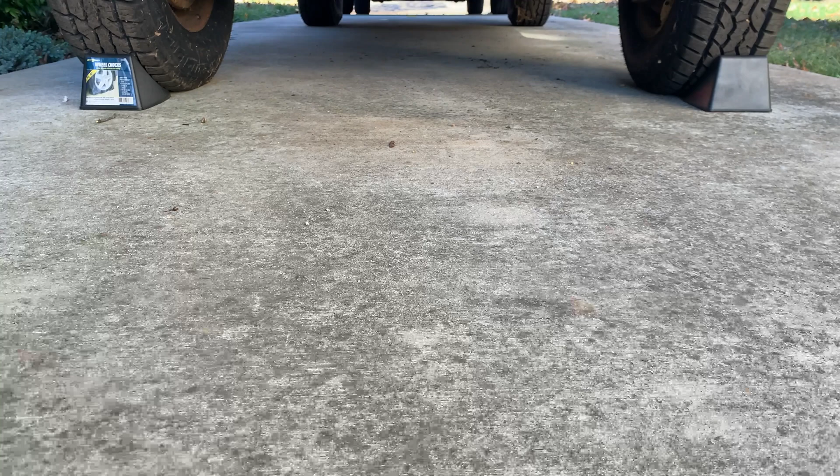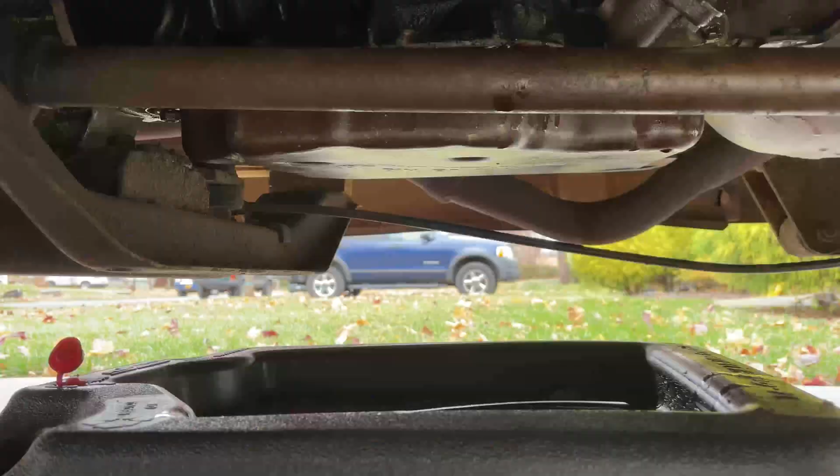Time it is. I've been putting this off for a month now, mainly because I just don't have time to commit to doing this, because this is going to be a long process. But I need to check that pan for debris, and the vent line that is way up there behind the dipstick. I need to flush that out with some brake clean to make sure that's not why this thing is puking fluid out of the dipstick tube.

So I've never done one of these before. I've seen enough people do it to know that it's messy as all get out. So I'm gonna try to record some of this and show you what happens, but I make no guarantees, because the Jeep's just sitting on the ground. There's no ramps or jack stands under it right now, so this is pretty low, and filming is going to be hard. I really don't want to ruin my phone camera with transmission fluid, so I'm going to let this

thing drain. If anything funny happens, I'll show you, but once we get the pan out of there, I'll let you guys see what's in it, and I'll show you where the vent tube is if you don't know. And I don't know, I'm going to put brake clean down it. I don't know if that's the right way to do it, but I've heard of other people doing it. As long as the pan is off, it should just come straight out and go into the catch pan. Obviously I wouldn't think you would want that floating around in your transmission pan, but yeah, as long as it's open.

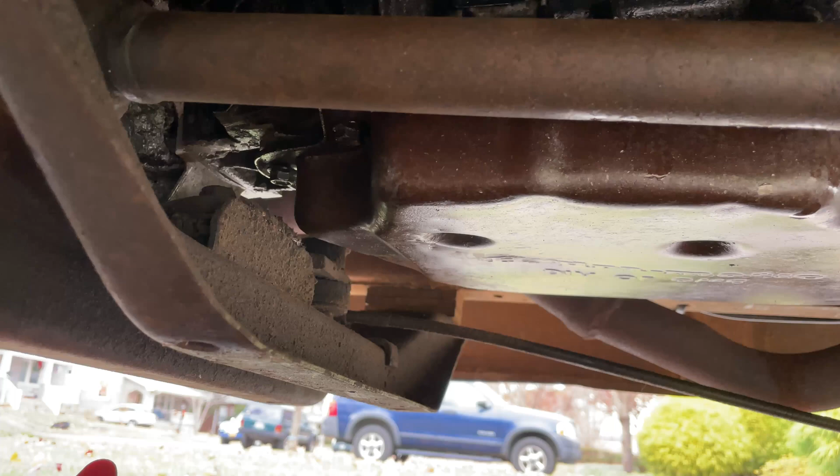So at least, worst case, when it goes time to put it back together, I'll be able to get my fingers up in there to get it tight, or get them started, and then the little box end in there to finish them down. All right, let's get rolling. Enough talking, enough stalling. Let's get covered in transmission fluid.

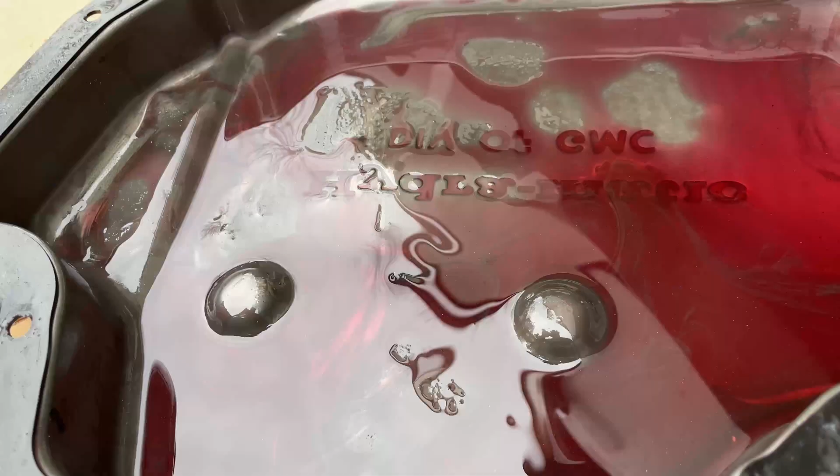All right, there's the pan. See, there's a lot of shiny stuff in there. Not a ton, it's kind of hard to see because the fluid is shiny. But let's see, it's not piled up or anything, but it's definitely in there. And you can see it's kind of glittery on the gloves too. And didn't make too much of a mess getting it out. But there she is. The next trick's going to be to get that cleaned up so I can get under it without getting dripped on. You can see it's kind of made a mess out of my work area.

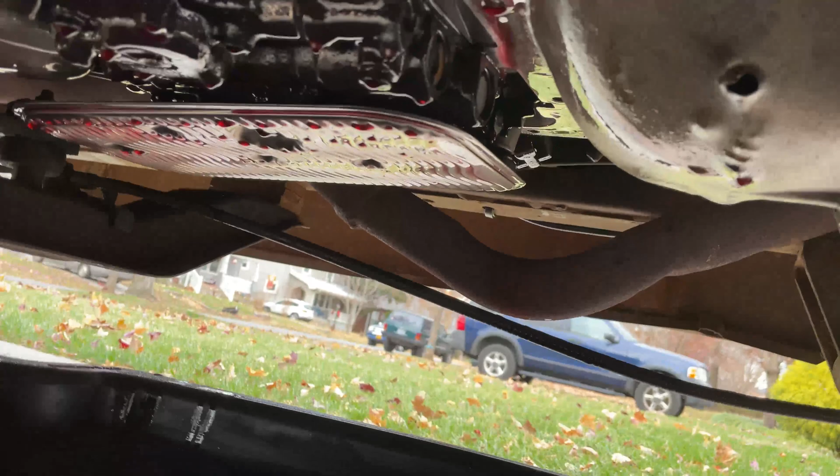Get that filter off of there and get the new one on. Get the mating surface cleaned up there, and the new pan gasket on. So I'm going to clean this pan up with some brake clean, and then I'll show you the kit. We'll get to flushing the vent tube next after that. Alright, so the vent tube, if you're curious, is on top of the transmission.

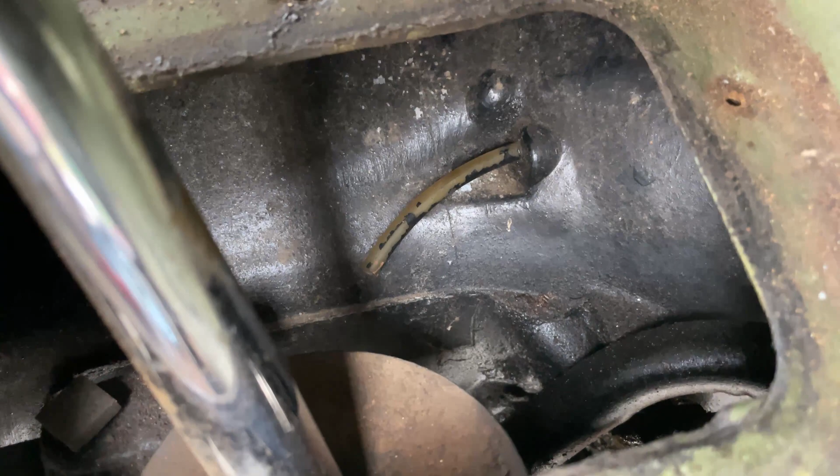It's right there, that little thing. Mine's plastic, but I don't know if that's normal or not, who knows, but it'll be there on a TH400, and it's just right under the four-wheel drive shift lever plate. So there's a gasket, the rubber plate, and then the actual boot. So what I'm going to do is I'm going to take some brake clean and try to get the straw for the brake clean can up in there and blast some in there, and hopefully it'll come out into the transmission catch pan that's under it.

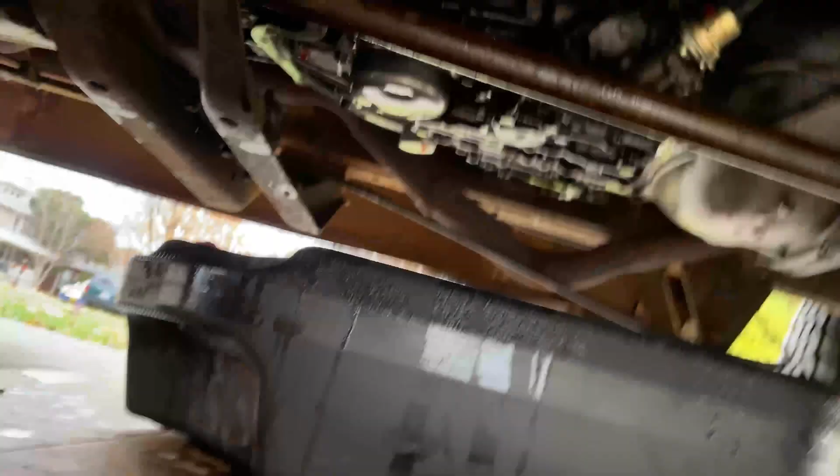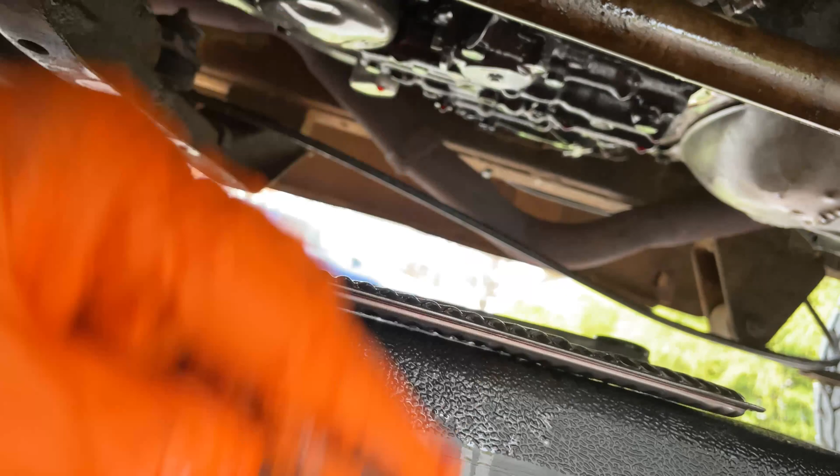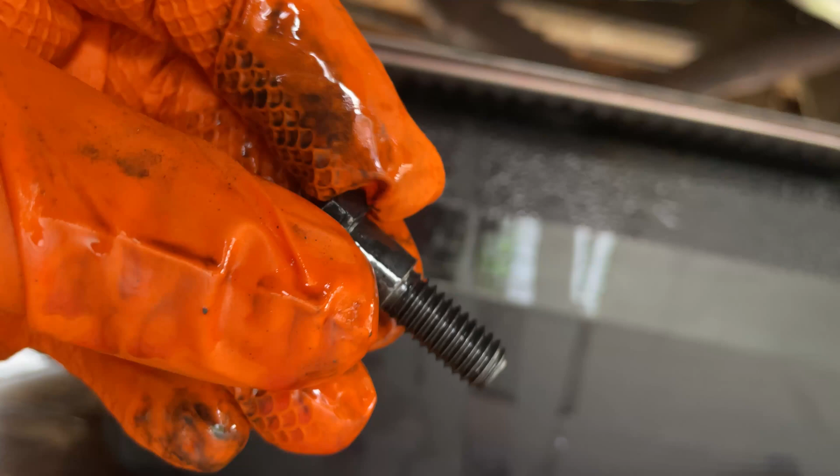But we'll see. I also noticed on the transmission filter, that hole right there is where the bolt goes to fasten it up to the transmission. It goes up into that hole right there with this shouldered bolt. Now in my case, the shouldered bolt was all the way down, but the filter was just doing that on it. I don't know if that's supposed to be that way. I have a feeling there's supposed to be maybe some kind of washer or something that goes in there to take up that slack. But also the filter was barely hooked up. It just fell off.

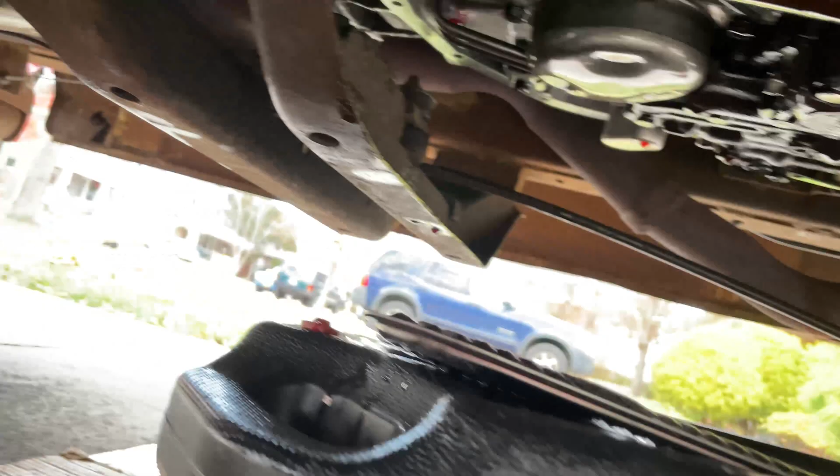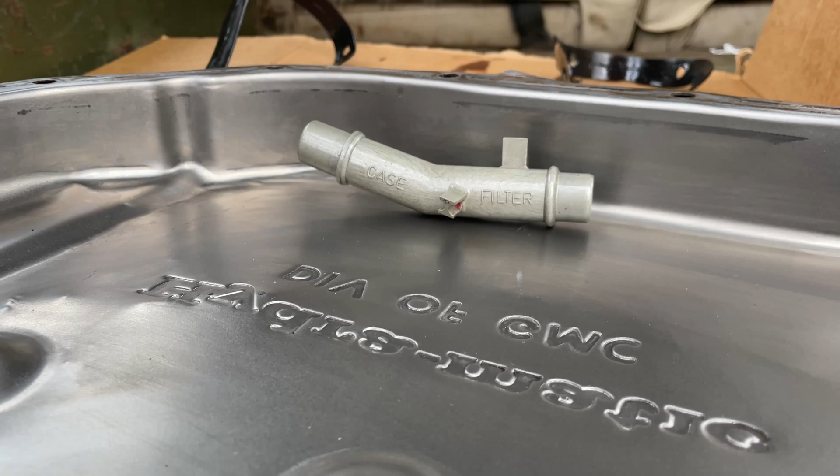I'll show you, there's a tube too. There's the pan all clean, but that little tube just goes in there. You see it's labeled case filter, so filter side goes into the filter, case side slides up into the case. There's an O-ring up in there, I guess. It all came out as one piece. I'll figure that out next. We have to throw a washer on there or something to snug that up. But I'm gonna keep moving.

Again, I turned that little guy up a little bit, gingerly. Don't want to break him off. This is the third time I've done this. The first two times not much came out, but now it's coming right through. So I don't know if that's telling me that I flushed something out of there or what. I also don't know if that's bad for the transmission.

I assume that the vent tube just comes right out of the bottom, so if I let the brake clean evaporate, I'll be fine. So if you're watching this video and you choose to do it this way, your mileage may vary. I've seen others do this with TH400s with no negative side effects. But like with all things on YouTube, take it with a grain of salt. If you're not willing to potentially damage your transmission, then take it to a professional, or I guess do some more research.

But I'm comfortable with doing it this way, just because I've seen others do it and it seems to work. But I'm going to let that drip. I'm going to flush it a few more times just to make sure. And yeah, next steps are going to be looking for a washer to put that filter back on, get all that reassembled, pan back on, and then we're going to crank it up, top it off, and hopefully that will fix our problems. Or I just made it much worse. I don't know, but that's part of learning, isn't it?

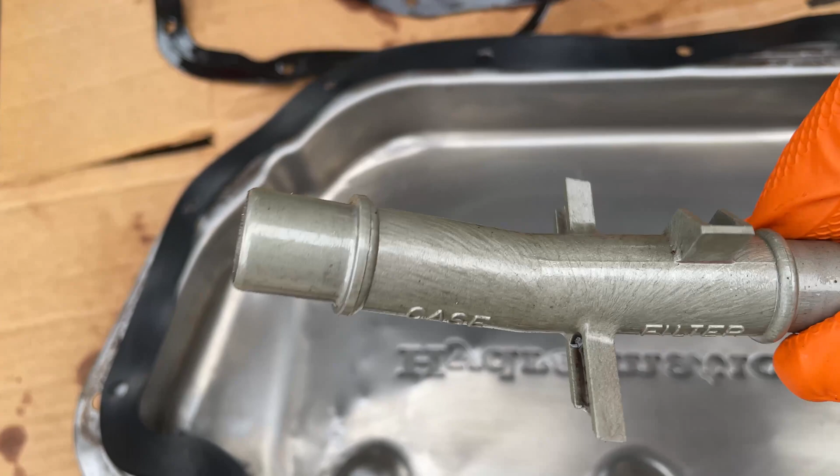Okay, so here's another close-up look at this little thing. It's just plastic. Cleaned the pan out with some brake clean. This is the new gasket, and I just checked it does line up. Check it before you throw the old one away. This one's still in okay shape, so I could probably reuse it. It looks like this thing was serviced relatively recently, which could be good or bad, I don't know.

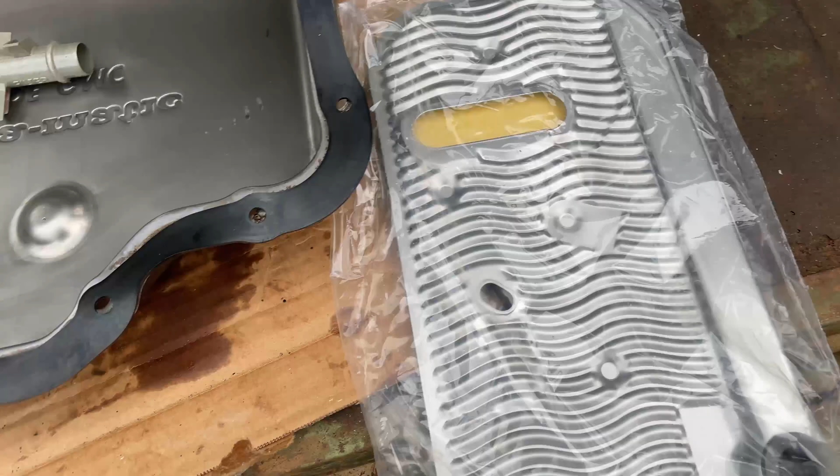Here's the new filter, and you see there's still no grommet there, so I'm going to have to figure out what to do, or go look at the parts book real quick and see if there's supposed to be a spacer in there to make that bolt tight. And this is the part number for the kit. I got this off of Rock Auto, I think for $10 or $15. It includes the gasket and the filter, and that's pretty much it.

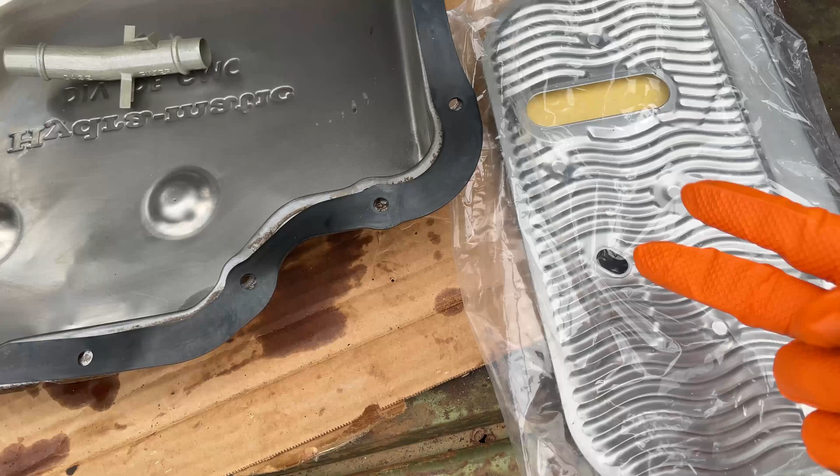So let me go see what I can find on the parts book about what to do with this. If there needs to be a washer in there, or if that's supposed to be able to move. I mean, maybe it's supposed to be kind of floating in there. I don't know. I don't think so. That seems like a bad idea, because that will allow this to come loose. But who knows? Maybe it's designed that way. We'll go find out.

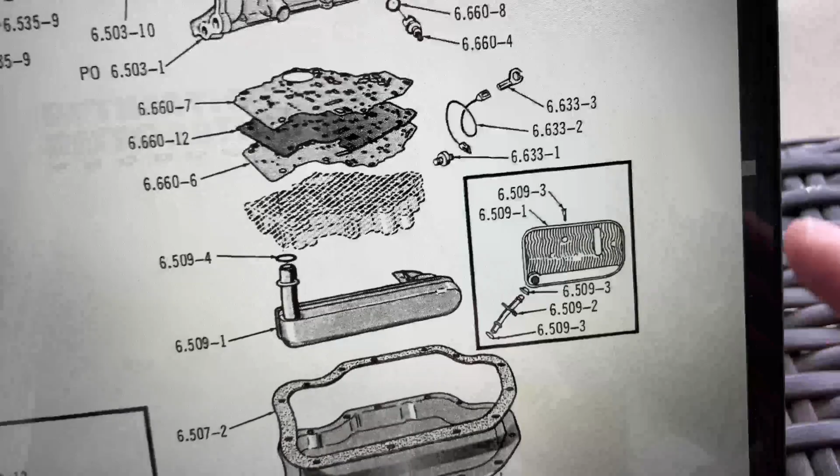Okay, so here's where we're at. Nothing like using a camera to film a computer screen, but here's the parts book. You can see the filter right there, and if we take a close look at it, there's the bolt, filter, there's our O-ring, there's our filter neck, and then there's the O-ring that stayed in the transmission when I pulled the filter neck down. I don't know, maybe that's how it's supposed to be.

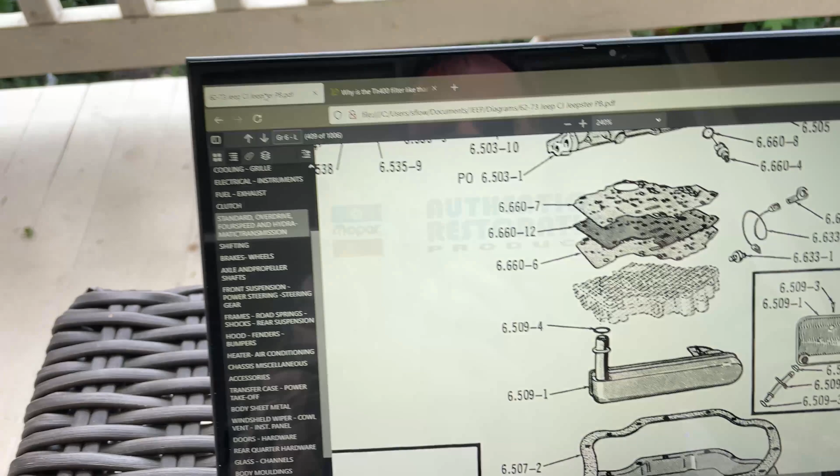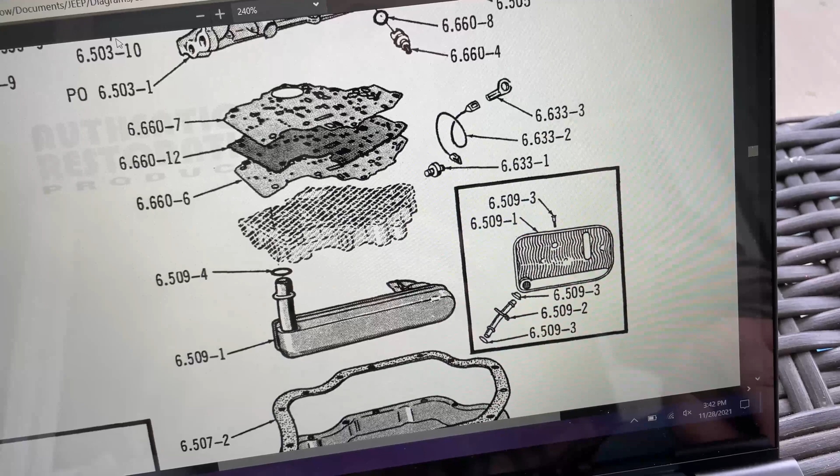So my guess would be that maybe it's to account for angles in the transmission. So if the fluid goes low, the filter kind of floats in there. Or if you go up an incline or something, maybe, I don't know. It was shifting just fine the way it was. The only issue is it's burping fluid out, which is making it run low and then slip. So I'm gonna put it back together the way it is. I'm gonna give it a little bit more time to drip dry, and then we're gonna get the show moving.

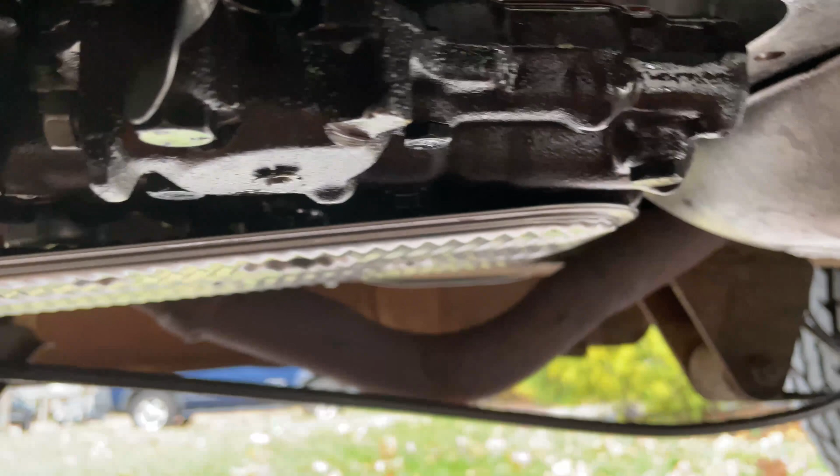So there's our new filter. It's kind of a pain to get that neck re-engaged over there, but it's in. There's the pan. Notice how the filter is flush against the front of the valve body up here and then kind of dangles back here. I'm gonna show you how it has a lot of slop in it. That's what I was worried about, but apparently that's normal. I don't know.

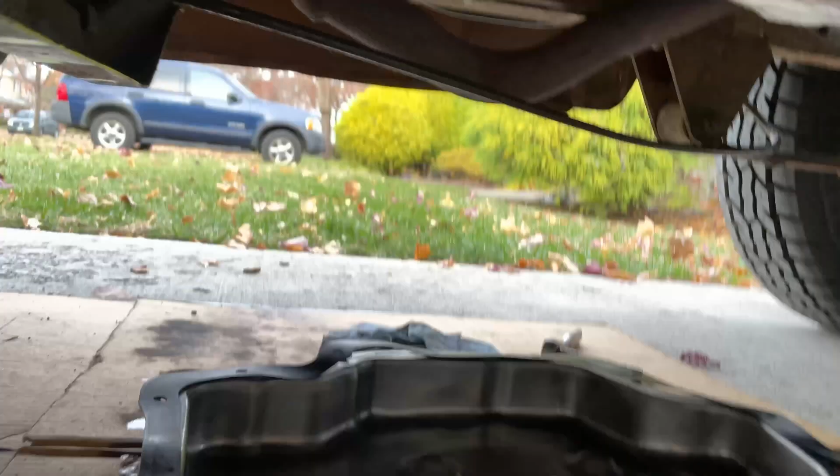So I'm gonna get the pan here. I'm gonna try to get a couple bolts in with that gasket and get it situated. I'll work my way around to the back here, and then start buttoning it up. It's been sitting about 30-45 minutes to let that brake clean evaporate out of there and drip. And it's done dripping now, so whatever's gonna come out is out. So we're getting closer to the finish line, but let's go ahead and wrap it up.

There it is, back on. Not super hard to get back on. The gasket was tight enough that it actually held the bolts in for me while I snug them down. Kind of like doing the valve cover gasket, kind of work your way around. Don't snug one all the way up and then start the one next to it. Do it in stages. You don't want to warp the pan or anything.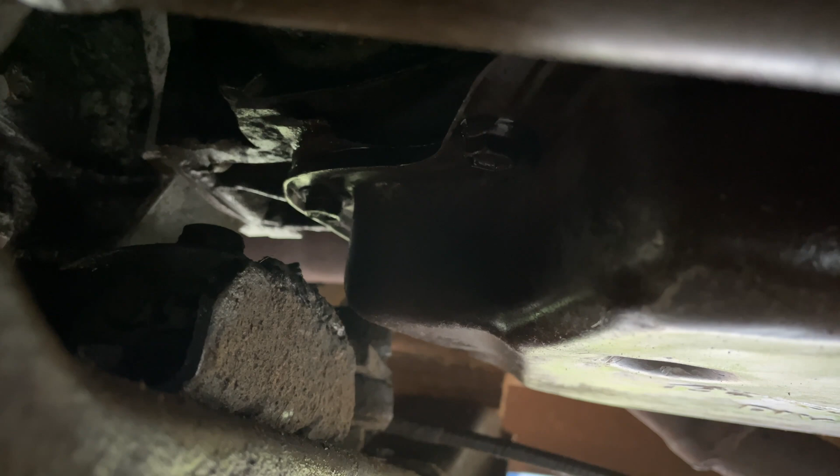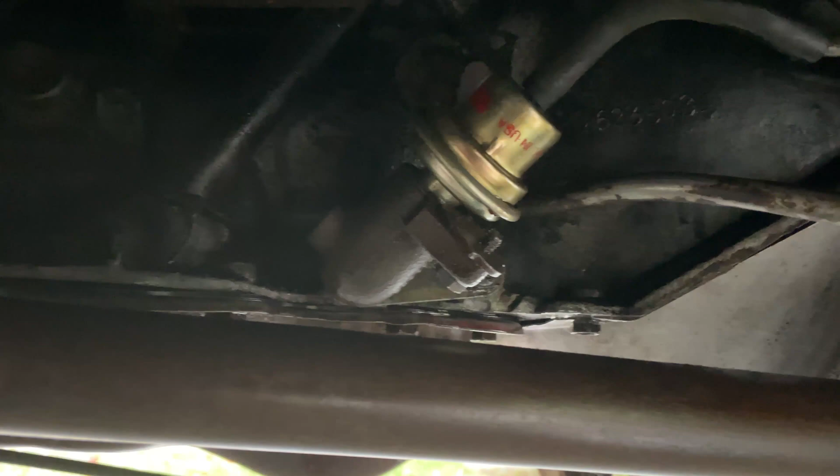Those two back there directly above the transmission mount, well, the worst can only be gotten to with a box end, which is about an 1/8, 16th of a turn at a time, but they're tight. All of them are tight. So at this point, I see the gap all the way around. There's no spaces or anything, just the gasket.

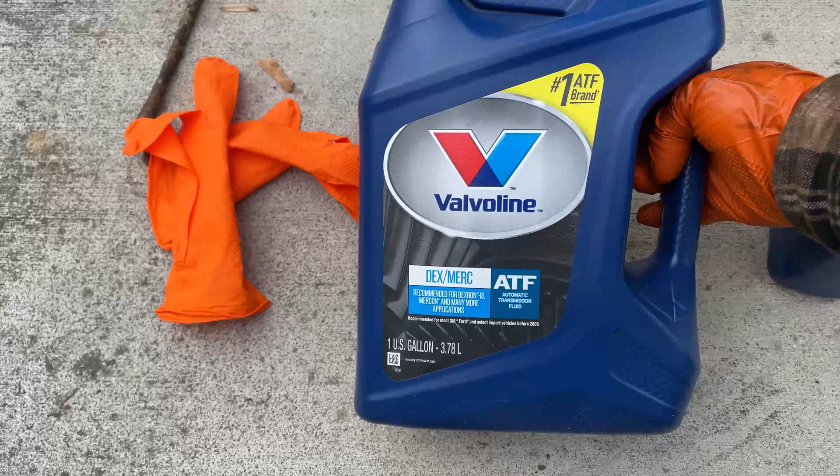I'm gonna fill it back up. I'm gonna start with 3 quarts, check it, and then I've got 5 quarts total to put in it. If it takes more than that, then it's gonna have to wait. But let's do that part next, see what happens. All right, this is the stuff I'm putting in it. Just ATF. Like I said, I got a gallon and a quart, so 5 quarts.

And dipstick tube back there. So I'm gonna go grab a funnel. What I'm gonna do is fill it up, put some in it until I can see it on the dipstick. It should read high when the engine is off because all the fluid's in the pan. When you crank it up, it sucks it up and then runs it back through. At that point, I can check it for real, but it has to be running in neutral. So, okay, I'm gonna go grab a funnel. We're gonna top that off and see where we get.

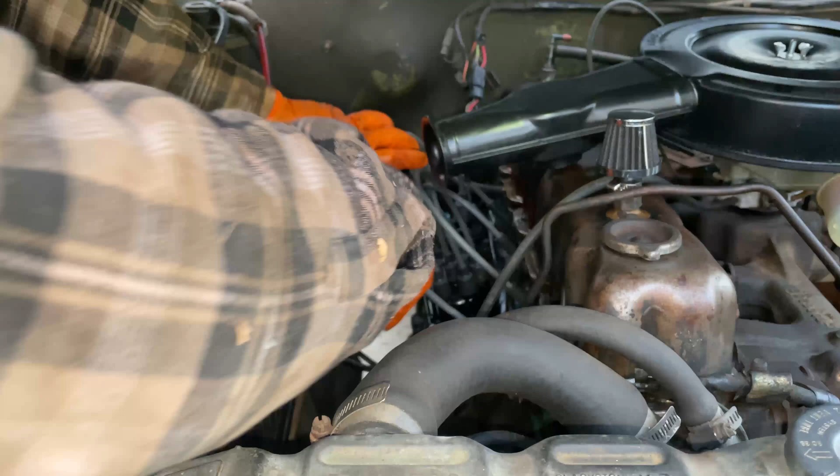She's got about 3 quarts in it now. So let's check it. As far as I know, if there's any on the stick at all, as long as it's not at the very bottom, there should be enough to crank it up at least. And we're right on the add line, so it's gonna read high while it's off, but let's just crank it up and let it run for a minute, and then check it while it's running. Let it circulate some fluid. We'll check it again. I have to move the camera though so you guys don't fall off.

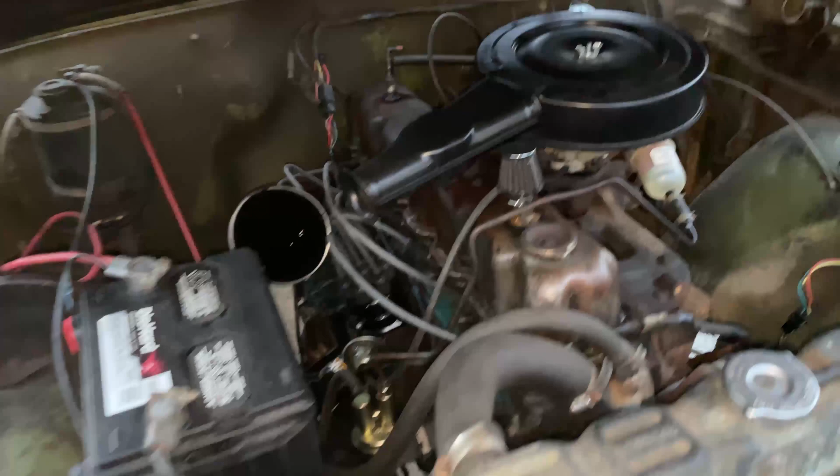Alright, so it's running. I have all my gears, or at least forward and reverse. It's in neutral right now. I got the wheels chocked. I'm trying to be safe, unless it goes into gear and runs me over. Stand on the side. So I put another 1.5 in it after it's been running. It's still pretty low on the stick. So I'm gonna let that run for a minute and then check it again. So far so good. Nothing's leaking and it engages well.

Alright. Enough dinking around. Let's do something, huh? Alright, so, a little test drive here. Maybe. This thing hasn't been driven since I got it back from the shop, other than in the driveway. So I may well lose you folks. We'll see. Get in drive, buddy.

Alright, let's see. Nothing yet. Do we dare take it on the street? Try it. Alright. Headlights are on. Turn signals work. In gear. Alright, we're just going up one block. How bad can it be, right?

That poor speedometer. I think something's broken in it. I was excited that it worked originally, but I have a feeling something's bound up in there because every time it clicks, it bounces. I think I might have adjusted the idle down a little bit too much. Here we go. Speedometer, goodness gracious, I'm sorry, buddy.

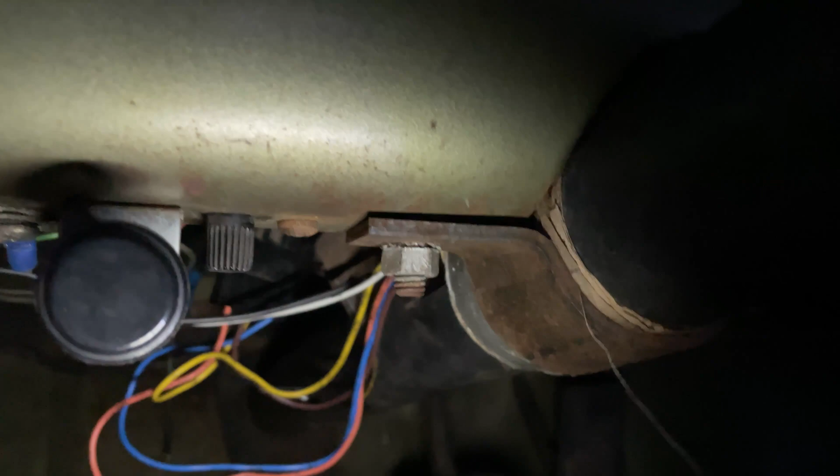Alright, some bonus footage here. And no, it's not leaking transmission fluid yet, which is good. But this just started working. So that comes on with the lights. This little rheostat right there. He's broken. But the wires on top, if you jiggle them, that comes on. More electrical problems. And a broken speedometer now. Yay. But it's not leaking fluid out of the dipstick tube yet. If I had some wood around here, I'd knock on it. But anyway, now I'm done.